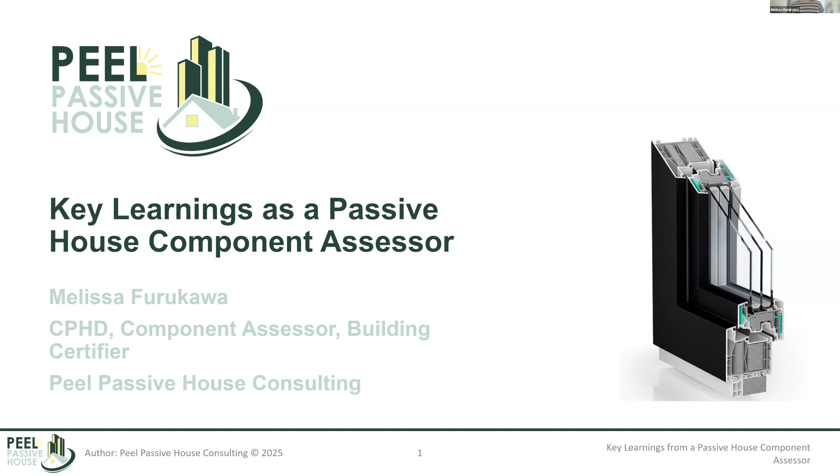I'm based in Canada. I work for a company called Peel Passive House Consulting. If any of you know Andrew Peel, he's the founder, and we do passive house consultancy work. We also do passive house building certification, acting as the third party verifier to make sure the building is meeting all of the passive house requirements. We also do component certification, and for this we work very closely with the Passive House Institute.

We work with manufacturers, doing all the modeling and submitting all the documentation to PHI. In the end, for both building certification and component certification, PHI gives the certificate, but we're acting as the reviewer on their behalf.

We also do some passive house research. Right now we're doing a research project on supply air cooling to see if we can provide all the cooling for the building through just the supply air. In this way, we can have one heat pump to provide domestic hot water, heating, and cooling, with no extra ductwork for any of the HVAC stuff. That's underway, and we have some pilot projects going up all over Canada.

We also do passive house training. So if you are already a CPHD and you need those credit points to keep your designation, we have some master classes on our website. They're all self-paced, so you can do them on your own time. We have a design PH course, and a third course, Heat 3, which is for 3D modeling. We have a whole bunch of different courses for those folks who already have their designation.

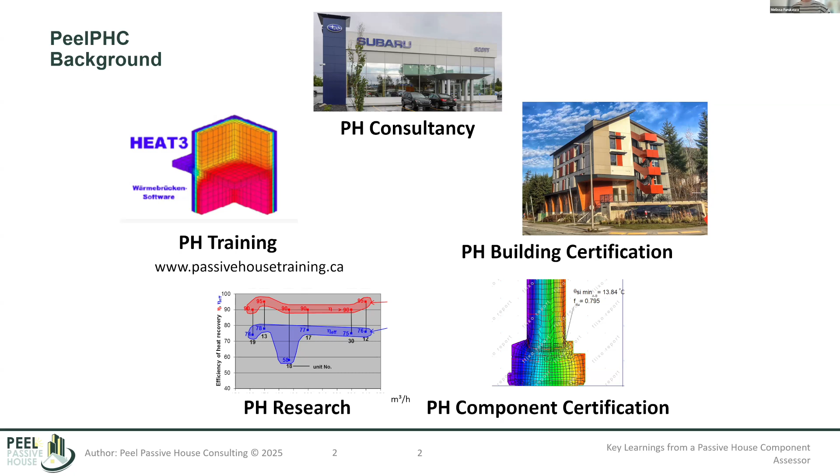Today I'm going to be talking a lot about windows. So first of all, why should we certify our windows? We're seeing a huge boom in high performance buildings, and as we all know, high performance buildings require high performance components—the ventilation system, the HVAC system, but also the windows and doors, the air barrier materials. As we have this rise in high performance buildings, we also see this rise in demand for passive house certified components.

Why passive house in specific is because that certification provides assurance that the products are complying with a rigorous standard for quality and performance. If you've ever worked on a passive house project, in order to do that PHPP modeling, we need certain performance values that aren't always easy to get without that certification. So by going through the certification, you have all of the information that the consultant would need in order to model the building with those windows.

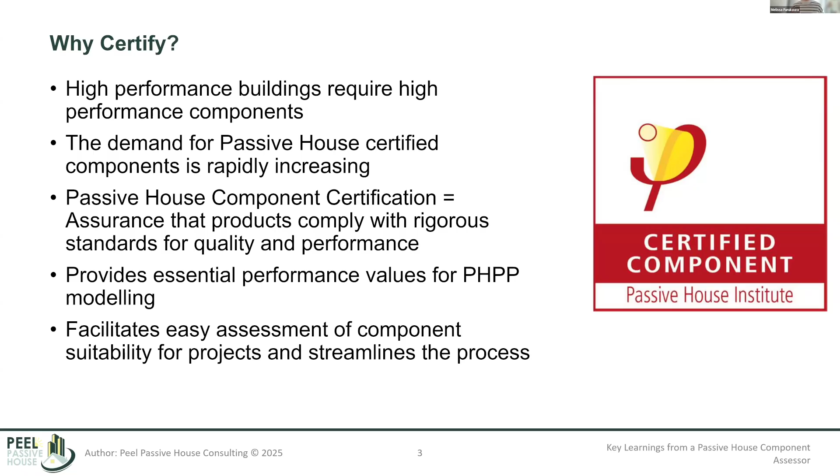This just facilitates an easy and streamlined process to assess different components to see, okay, does this work? You can test different window options and see what works for your building, because passive house is a holistic approach. It's not like you have to have this R value or use this efficiency ventilation unit—it takes into consideration the whole building and all these different moving parts. So we want to be able to have an easy way to test different options.

Now I'm just going to go over the criteria for Passive House certification. If I click this, then I have to switch my screen here. Oh yes, by the way, if you have any questions during the presentation, please feel free to just unmute yourself. I'll try to—I don't think I have the chat open, but maybe somebody can let me know if there's a question in the chat.

I'm happy to just answer questions as we're going. I feel like sometimes that's easier. Yes, I'll keep a track of the questions, and as they come, I will let you know. Thanks, Hima. Sometimes that's just easier than trying to remember your question and then go back to it at the end.

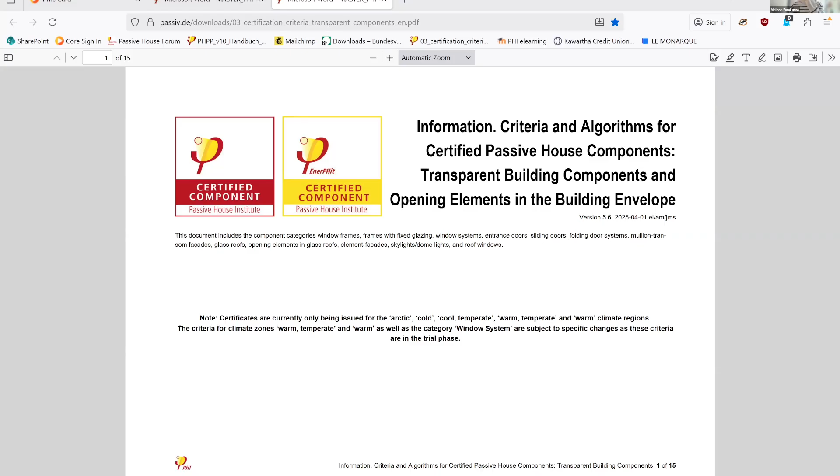So this is just the criteria, which is available on the Passive House Institute website. I'm not going to go over it in detail, but just give an overview. It goes over all the different criteria for the different climate zones.

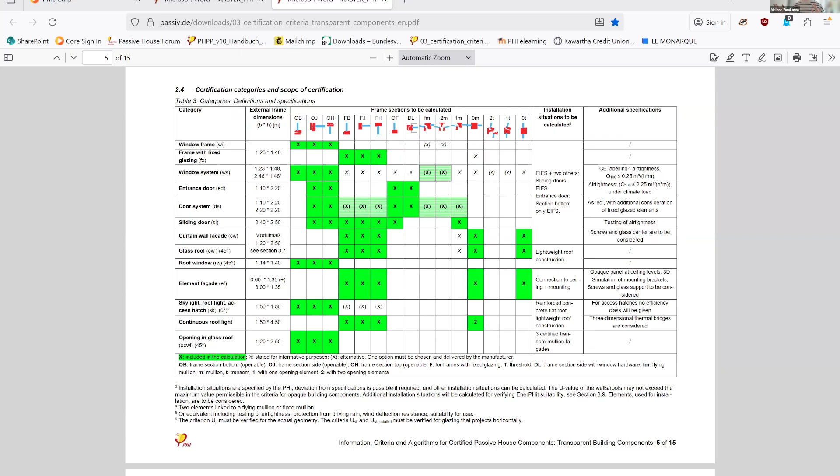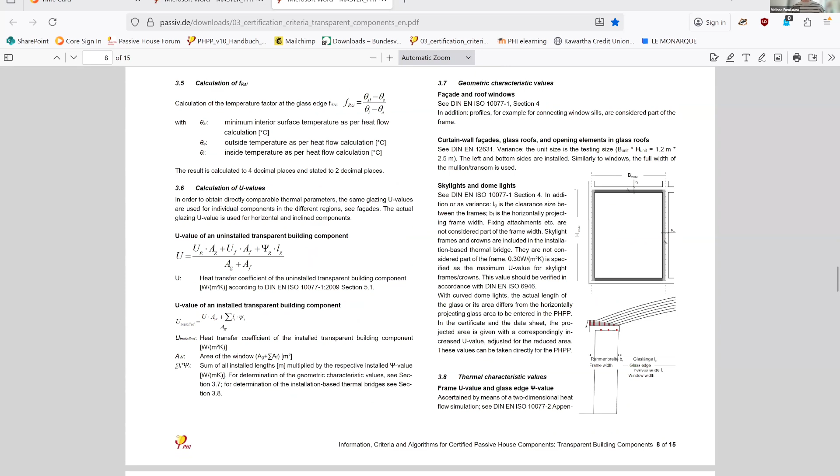It also goes over what kind of modeling is required for different window types. So you have window frames, but also doors, sliding doors, curtain walls and skylights. There are many nuances between those. It just goes over all of the requirements, a description of them, and how to calculate things. So that's available if you want to take a deeper dive into that.

But fundamentally, the criteria is looking at 4 different things. One is hygiene, the second is comfort. Then we also have energy and airtightness. These are the fundamental criteria.

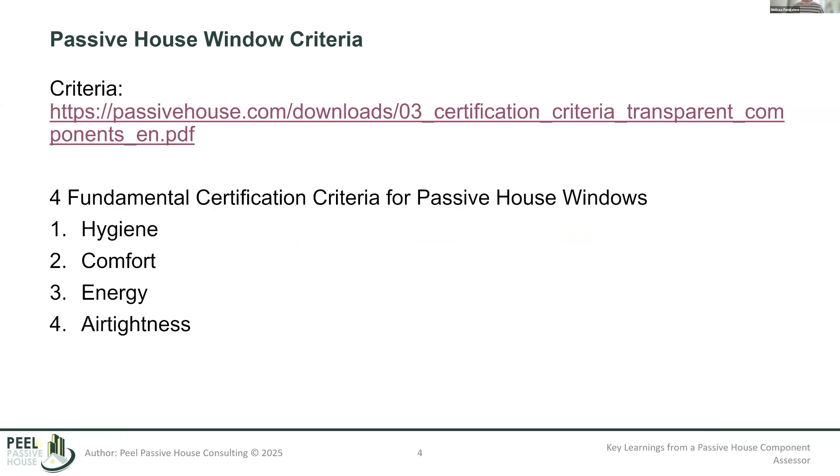So hygiene, when we're looking at hygiene, we're really trying to reduce the risk of condensation and mold. The way we do that is by ensuring that the minimum temperature on the interior surface of the window is high enough, so that we don't have condensation forming or this risk of mold growth. This includes on the frame, but also on the glazing and on the glazing edge where the glass meets the frame. This is actually where we typically see the lowest temperature on the inside of the window, because of the thermal bridge created by the spacer, which we'll talk about more.

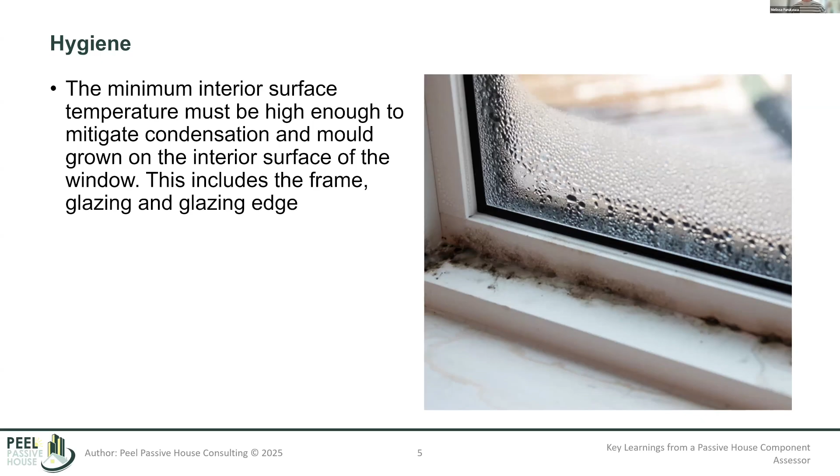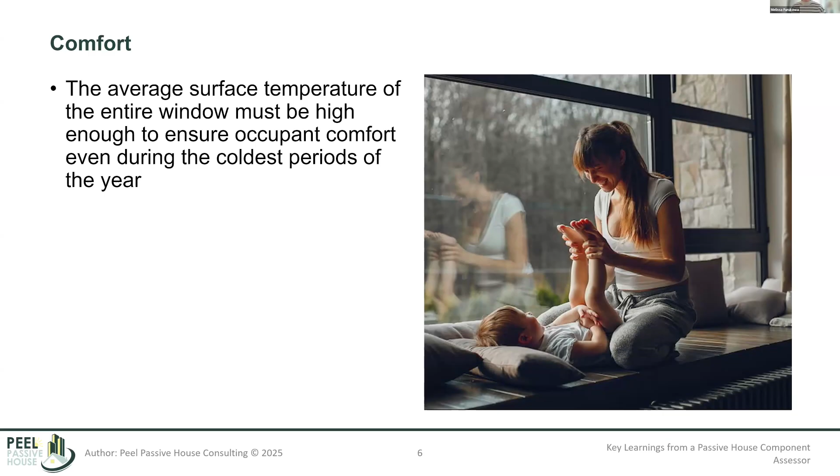Comfort. What are the main benefits of Passive House? I think everybody always thinks energy, but second is comfort. We want the occupants to be comfortable in the home, even if they're sitting right next to the window on the coldest day of the year, they should feel comfortable. The way we ensure this is that the average surface temperature on the entire window is high enough. In traditional code buildings, a lot of the times to reduce condensation risk, mold growth, and improve comfort, there's a heater near the window. This is an unnecessary added component, an added expense, and it impacts the design and functionality of the space. But with Passive House, we don't need that. It's been shown that we can achieve both comfort and hygiene without having these additional heaters.

Obviously, if we're talking about Passive House, we're thinking about energy and thermal performance. So the whole window has to meet a certain U value, a maximum U value or minimum R value that the whole window has to meet. This is basically to ensure that we're not losing heat over the winter, and we're reducing the total energy demand of the building.

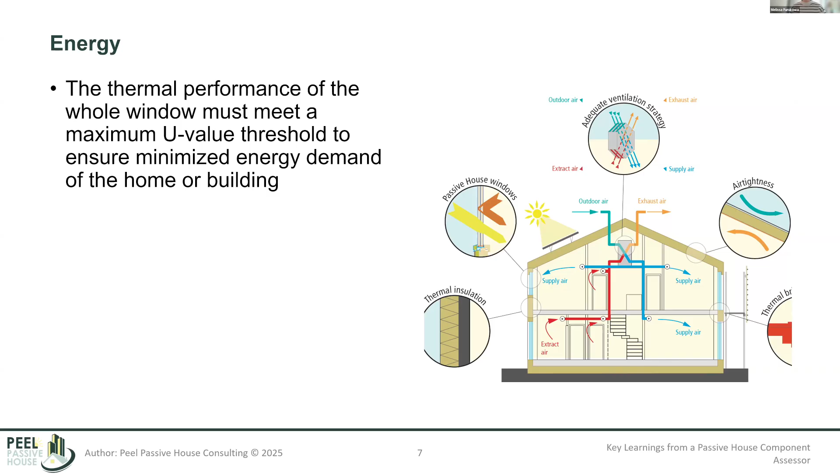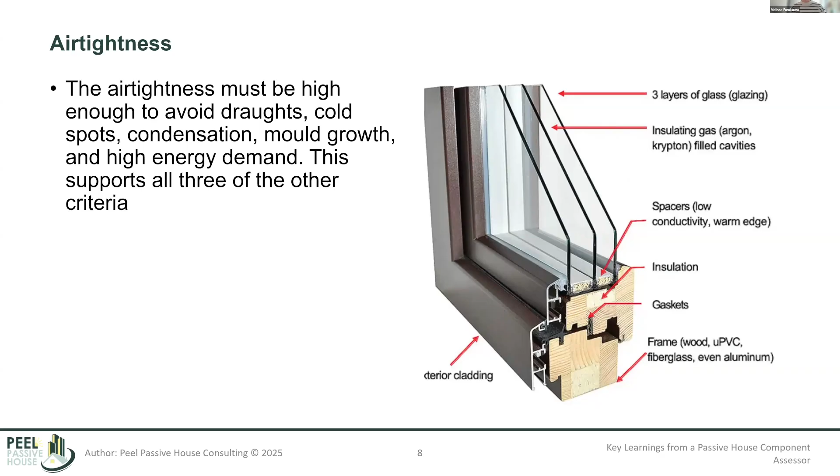And the last thing is airtightness. We want the window to be airtight to avoid drafts, cold spots, condensation and mold growth, and also high energy demand. So this aspect really supports all of the other 3 criteria. Just like we have a whole building airtightness requirement, the whole building needs an air barrier and be connected, but the windows are a key part - if the window is leaky, then the whole building is going to be leaky. Especially for operable windows, the way to ensure this is by having a triple gasketed window, which we'll talk about.

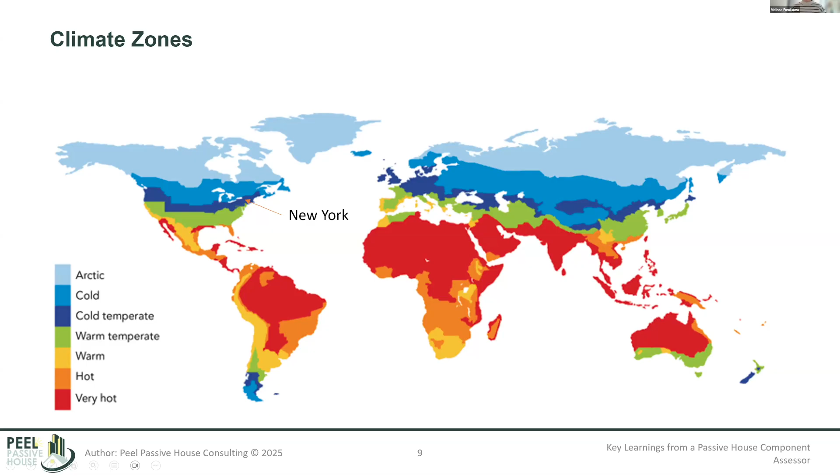Okay, so what is this FRSI? This is really pointing to that minimum temperature, and it's a way to kind of determine if there's going to be a risk of condensation or mold growth. So the calculation is basically you do a thermal model and you kind of see where's that minimum

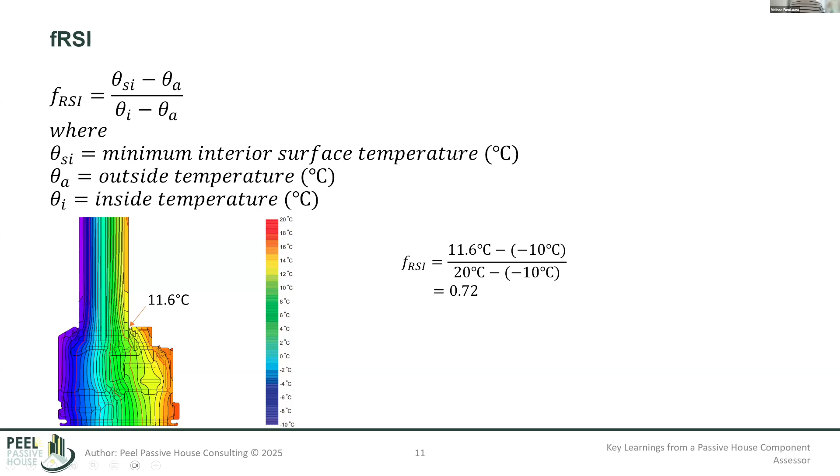But yeah, it's 11.6 degrees Celsius here, and then you minus the minus 10 as the outside. Typically, you model it as minus 10 on the outside and 20 degrees on the inside. So if you do that math, then you get 0.72 for this window. And if you remember, the criteria is 0.7, so we've met that criteria. It's greater than 0.7.

The next metric is the component U value. So this is the equation. Basically, it calculates the whole U value of the entire window by multiplying the area of the glazing by the U value of the glazing, plus the area of the frame times the U value of the frame, plus the length of the glazing edge - so that's kind of around the perimeter of the glass - multiplied by the psi value of this glazing edge or spacer, and then all divided by the total area of the window, which is the area of the glazing plus the area of the frame.

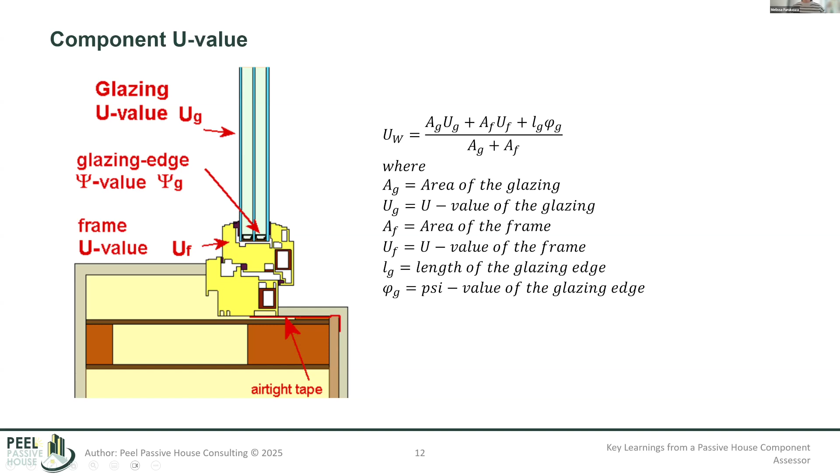So this all together, you can calculate the whole U value of the window, and that has to meet a certain criteria. And then like I said before, you also have to show that it can be installed in 3 different wall types. So basically, to get the U value of the installed window, you just add the length of the install - that's just the perimeter of the whole window - multiplied by the psi value of the install.

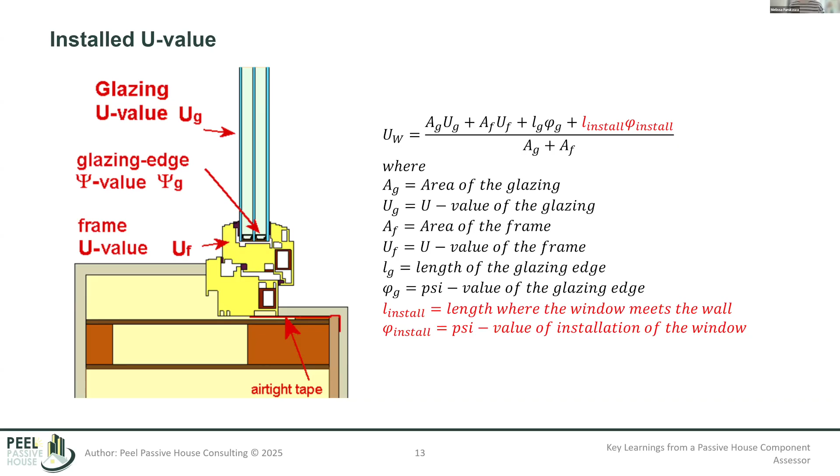Okay, so yeah, over the years, I've been working with a lot of different manufacturers on a lot of different window types, mainly aiming for either cool temperate or cold climate certification. So these are just some tips that I've kind of picked up over the years, just kind of working through some things.

So the first one is that the Passive House certification is really testing the frame and not the whole window package. So for cool temperate, for example, you have to use a reference glazing of U value 0.7. The manufacturer may have glazing packages available that are less than that, and 0.7 is, I would say, fairly high. Like for a triple pane, low-e coating glass, you can definitely get down to like 0.55, 0.6. So they may have glazing packages that are even lower than this, but for certification, you have to use whatever the reference glazing is for the climate zone that you want to certify for.

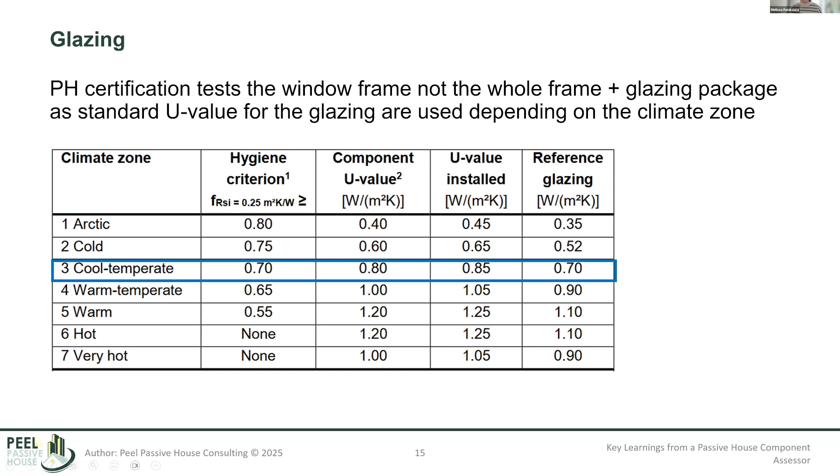Okay, so where to insulate? Looking at like PVC or fiberglass windows, it's most effective to insulate the larger air cavities that align with the glazing. These smaller cavities over here, well, first of all, it'll be so difficult to insulate, and second of all, it doesn't have a very big impact.

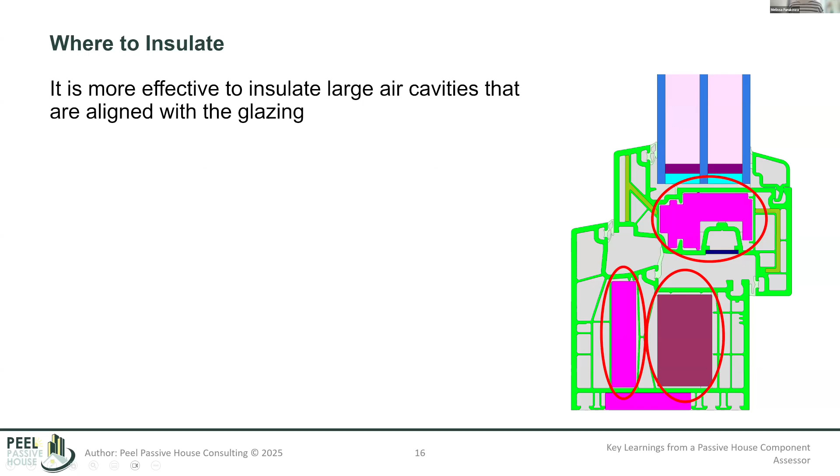For operable windows, it's important to break up this air gap that is between the sash and the frame, so that you can break it up with gaskets. Because the bigger this air gap is - air gaps do have conductivity, and they do have kind of insulative values, and the smaller the air gaps, the lower the conductivity is. So if you have a big air gap, then it's going to have a high conductivity and kind of increase the overall U value of the frame.

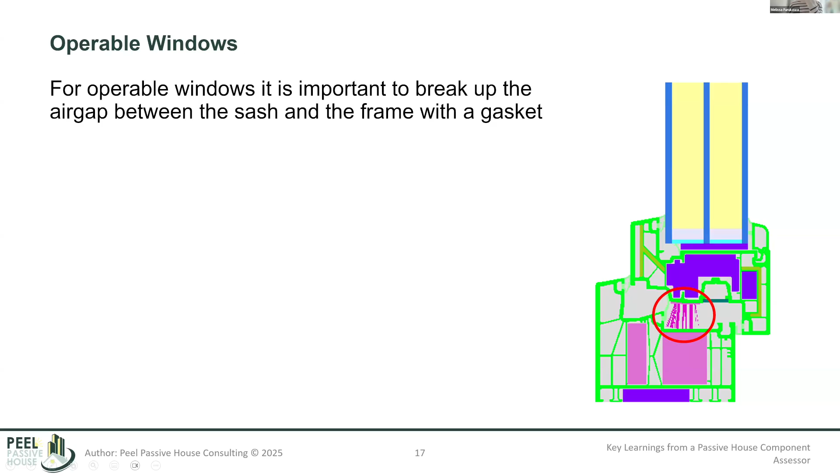Like I said before, for air tightness and water tightness purposes, it's important that operable frames be triple gasketed in order to meet those requirements. So this one has 3 gaskets in between the frame and the sash, and yeah, these gaskets also are helping to break up this air cavity here.

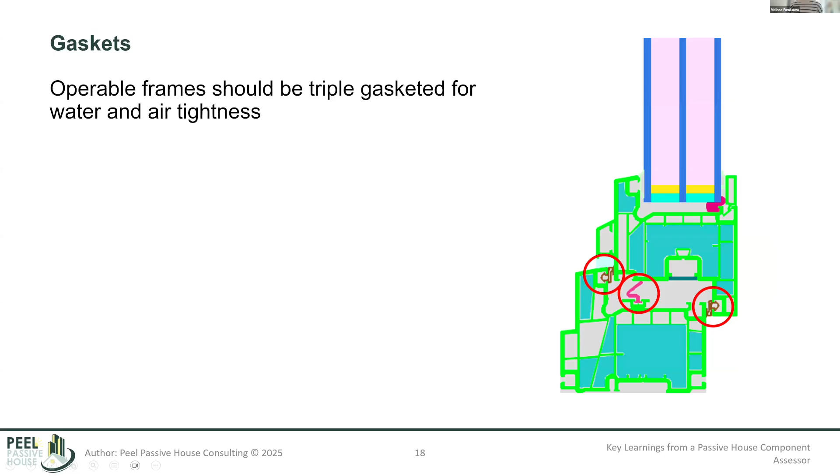Okay, talking about the air cavities again, we were recently working with a PVC window manufacturer. And actually, I was kind of surprised that they were able to certify their PVC frame with no insulation. And it's because the frame, to make up the design of the frame, there's all these small air cavities. And so those small air cavities, because they have small dimensions, they have enough thermal resistance without any insulation to meet the cool temperate passivhaus requirements.

Yeah, so this company, that's kind of their whole thing. They don't want to use foam, and so they've kind of designed a product that doesn't require any foam in it.

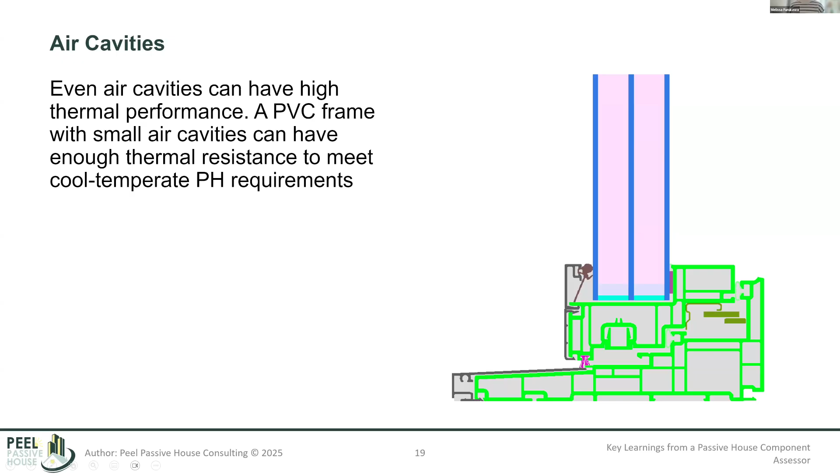Okay, I talked a little bit about this psi spacer, or glazing edge. Basically, the spacers that you put in between, so this is the glass, and then we have either an air gap or gas filled gap here, and these spacers kind of keep the glass in place.

There's various ways to reduce the psi value of that spacer. One is to use a high performance spacer, and there are many available. The other is to inset the glazing deeper into the frame. You can see this depth here is deeper into the frame than, well, this one's not too bad, but like this one. So you can play with how deep the glazing is inserted into the frame. This can both reduce the psi value of the spacer, but also increase the internal minimum temperature on the inside, which improves the FRSI value.

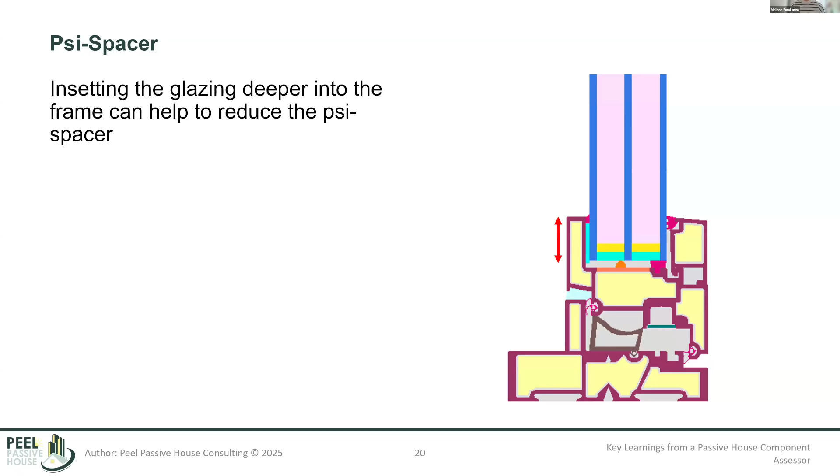Another way to improve the psi value of the spacer is to add a backer rod or some other material between the glazing stops. This provides extra buffer and also breaks up the air gap underneath, between the glazing and the frame.

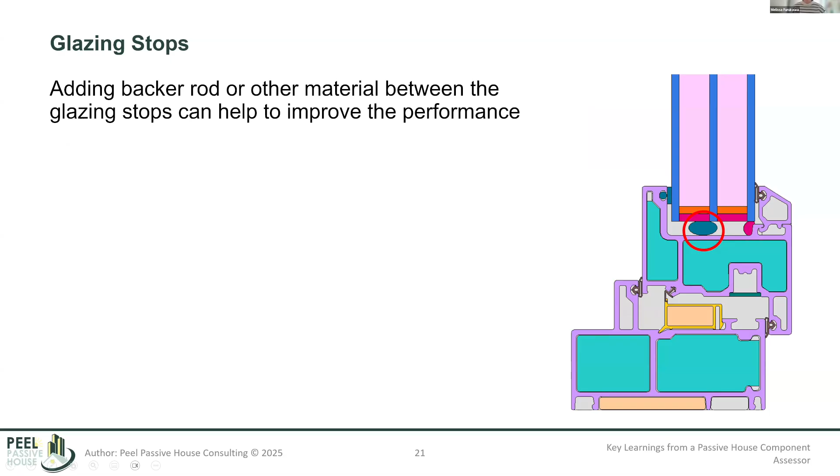Yeah, there's been a lot of interest from manufacturers, I guess especially in Canada, wanting to have a cold climate frame. And oops, I think, can you still hear me? Yeah? I think, oh yes, okay, there was a sound and I wasn't sure if my headset turned off, but okay.

So there's been a lot of interest in getting cold climate certified. There's not a ton of cold climate certified windows available on the database, and for good reason - it's a hard target to meet. It's very demanding.

A lot of the windows on the database are timber windows that have exterior insulation. The reason for that, from what I've found working with manufacturers, is if you have a fiberglass frame or a PVC frame, it's really hard to meet without using some very high performance insulation like aerogel. Aerogel is an insulation product with a very low conductivity, like 0.014 in metric units - just very low. It was originally developed for space use or something, so it's also very expensive. It can be very challenging to meet the criteria for cold climate without these really high performance insulation products.

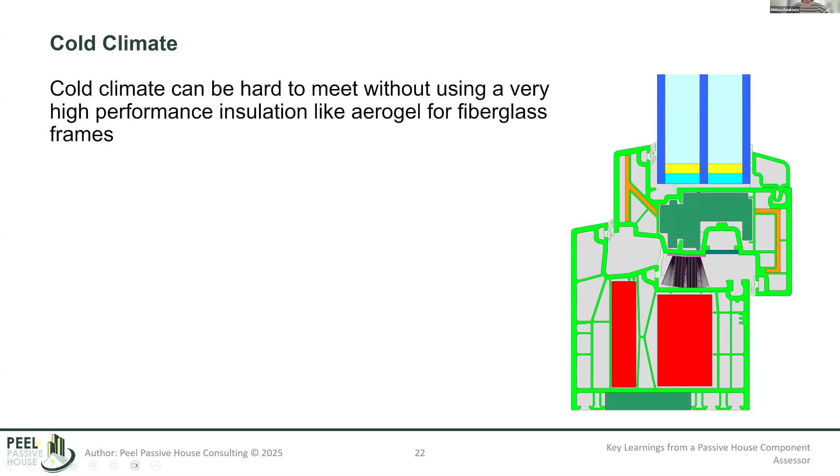We also had, I've been working recently with an aluminum frame window manufacturer. This was an interesting project where they had different frame sizes - a small frame and small sash, a small frame and large sash, a large frame and small sash, and a large frame with large sash. So we did these variant modelings to see what the impact is.

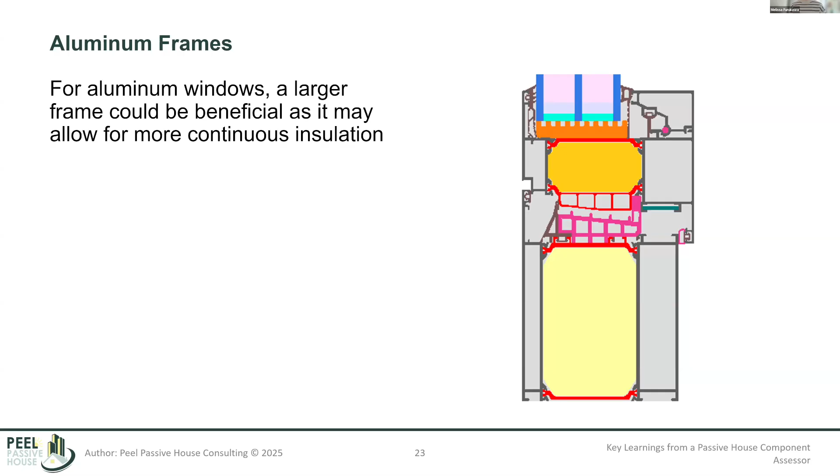If you think back to the formula for calculating the overall U value of the frame, there's the glazing and there's the frame, but you're calculating it for a fixed window size. So the bigger your frame is, it just means there's going to be a larger proportion of frame than glazing. Typically the glazing has a much lower U value than the frame, so it's counterintuitive - usually you want less frame because it has a higher U value. But in this scenario, because by increasing the frame we can add more insulation and reduce the U value, it actually was beneficial overall. Sometimes you think one thing, but you really have to do the testing and calculation to see.

So if it was just on the outside, like if they didn't have aluminum on the inside, that would probably greatly improve the performance of the overall U value of the window frame.